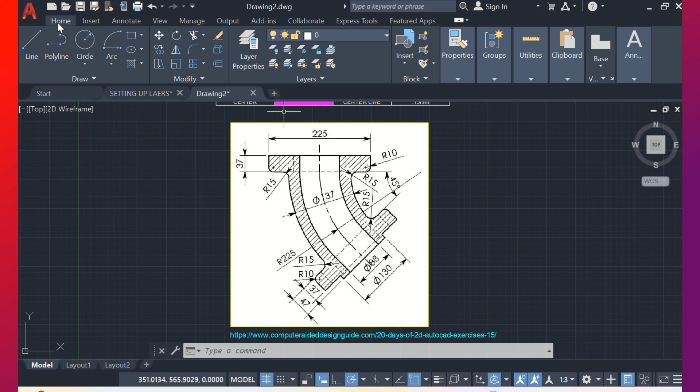So, we have name of the layer, meron tayong 5 in-identify na different lines. So, from that different lines, we have object, hidden, dim line, hatch, and center. So, ang gagamitin natin na kulay doon sa object is red. Ang line type niya is continuous, then line weight niya is 0.5. Sa hidden naman, ang color niya is yellow. You can choose your own color if you want. Line type hidden, then line weight is 0.25.

Sa dim line or yung gagamitin natin na dimension line, ang color natin is sky blue. Then line type is continuous, then line weight is 0.2. Yung hatch naman, ang gagamitin natin color is orange. Line type is continuous, then line weight is 0.15. Then we have another layer which is the center. Ang color na gagamitin natin is pink. Line type is center line, then line weight is 0.15.

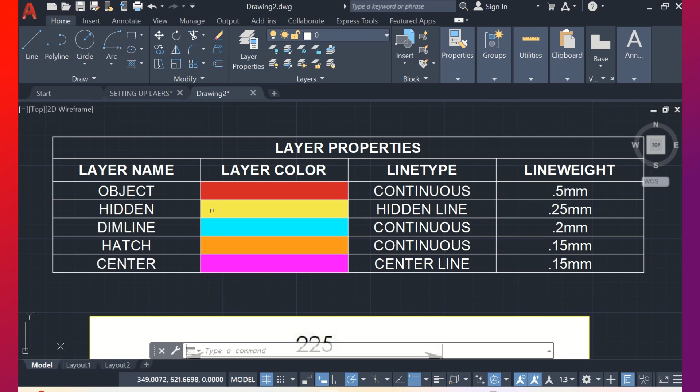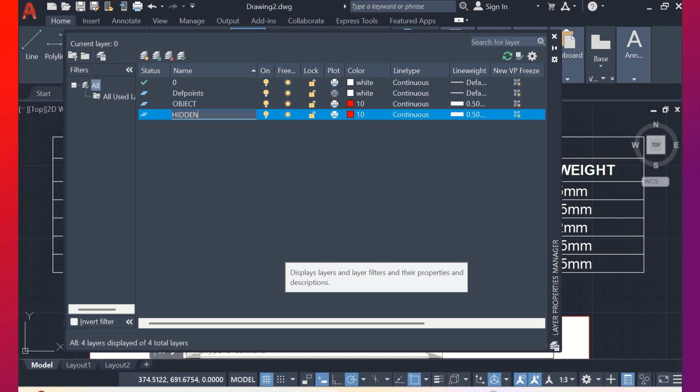Now, if you want to add another layer, just click this one. So this is what we call new layer or Alt N. Okay. So mag-click ka lang ng Alt tapos N to new. So papangalanan natin yan na hidden line or hidden. Okay. Our color will be yellow. Palitan natin to ng yellow. Our line type is hidden, then line weight is 0.25. Okay, then click OK.

Then Alt N na naman. So this time it will be dim line. Our color will be sky blue. So palitan natin ng sky blue. This one, then click OK. Then line weight is 0.2. Click OK. Then Alt N na naman. This time hatch. Then we have 0.15. Then line type natin dito is continuous. Yung dim line is continuous, hidden line is hidden.

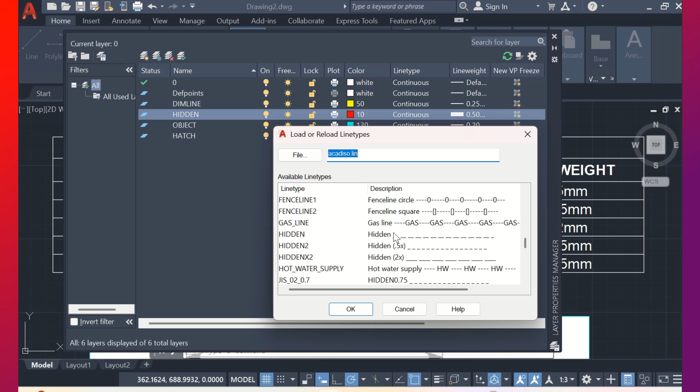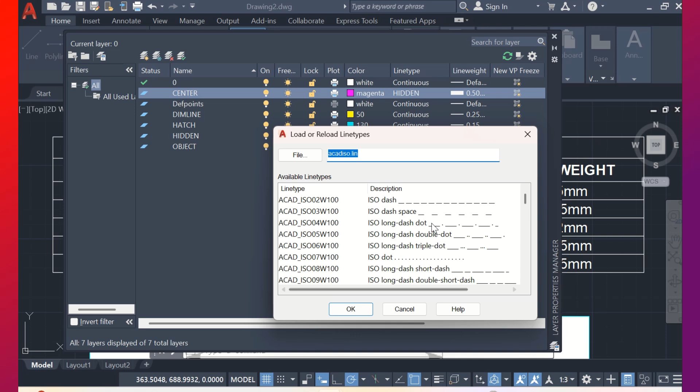Yung dim line, object line, then we have another one, Alt N, then we call this center line or center. Our color will be pink. So center, color is pink. Then line type, wala pa yung center line dyan, so mag-load lang tayo. Hanapin natin yung center. Click OK. Then click mo ulit yung center, then click OK. Palitan natin yung line weight ng center, it will be 0.15 and click OK. So we have 1, 2, 3, 4, and 5.